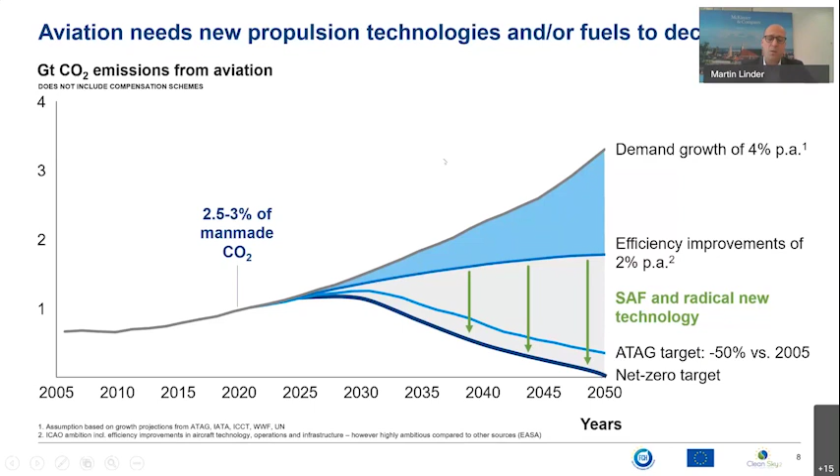The aim of the study was to investigate this latter option, the use of hydrogen to propel the airplanes of the future. In the course of this project, we evaluated whether hydrogen has potential, what technology developments are necessary, at what cost it could be realized, and what challenges need to be overcome. The objective of the study was neither to give predictions nor to provide an in-depth technical feasibility study. The purpose was to understand whether hydrogen has potential and therefore whether serious research and development effort should be devoted towards its development. We performed the analysis on 2 levels, the aircraft design and the infrastructure requirement.

The focus was on hydrogen propulsion. This includes 3 types of aircraft: aircraft that react hydrogen in fuel cells, and the resulting electricity then drives the motor and the propeller; aircraft that burn hydrogen in turbines; and a combination of both, a so-called hybrid hydrogen aircraft. Our findings demonstrate that hydrogen has significant potential to decarbonize aviation alongside other technologies. It is not the only solution, but it is an important part of the solution.

We developed this study together with industry, academia, and researchers. The 24 companies and organizations listed here participated. The group includes aircraft manufacturers, component suppliers, airlines, airports, and research institutions. A big thank you for all your valuable contributions. Without you, this report would not have been possible.

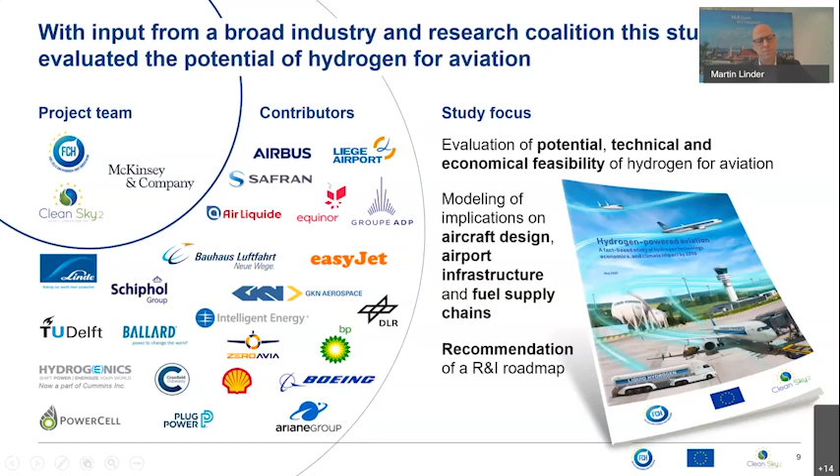We start by clustering the commercial aviation sector into 5 segments characterized by the amount of passengers transported and the range traveled. So on the left, you can see commuter, regional, short range, medium range, and long range aircraft. Roughly 2/3 of today's CO2 emissions come from flights operated by short and medium range aircraft. So flights with 81 to 250 passengers.

These aircraft account for the major stake of the global fleet, about 70%. Less than 5% of emissions are caused by regional and commuter aircraft. The remainder of emissions stem from long-range aircraft. For each of the segments, one concept aircraft powered by hydrogen was designed. For these analyses, we evaluated the climate impact, the technical feasibility, not only for the aircraft design, but also the infrastructure and the economics of such aircraft.

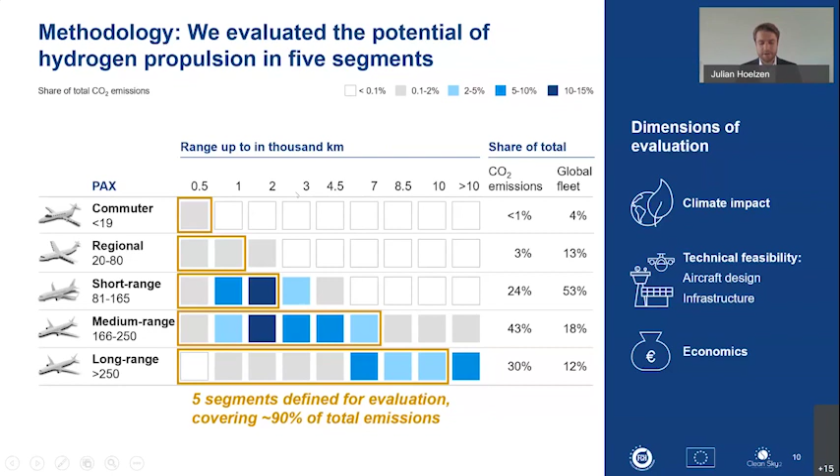In addition to this, we compared hydrogen-powered aviation to aircraft powered by sustainable aviation fuels, focusing on synthetic fuels. Let's turn to our analysis and results on climate impact next. Let us first take a look at how aviation contributes to global warming. On the one hand, there are CO2 emissions, and every ton of fuel burn produces 3.15 tons of CO2. Beyond CO2, there are also other emissions, such as nitrogen oxide, soot, and water vapor, which create contrails and cirrus clouds. These non-CO2 emissions also have a climate effect.

To assess the full contribution of aviation to global warming, we need to consider CO2 and non-CO2 emissions. There is still an ongoing scientific debate about how much non-CO2 emissions contribute and the translation into an aggregate measure. In this study, we used the concept of global warming potential measured in tons of CO2 equivalent and looking at a time horizon until year 2100. For conventional aircraft, research shows that the climate impact of all propulsion-related emissions could be 2 to 4 times compared to the effect from CO2 emissions alone.

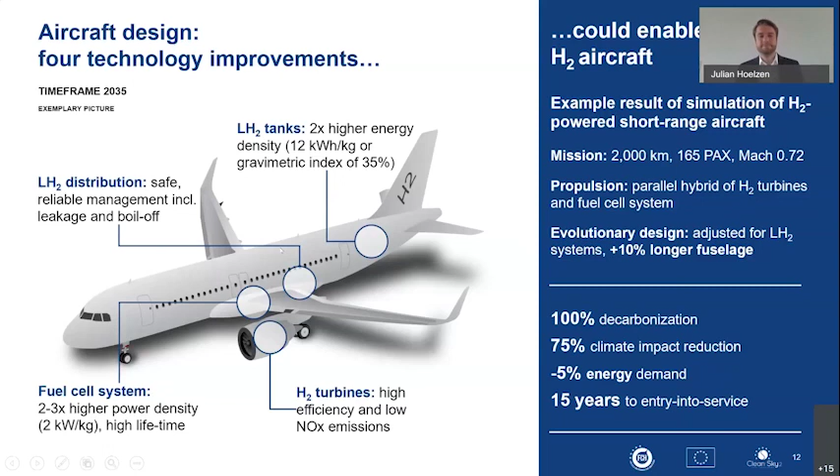So hydrogen propulsion not only has an effect on aircraft design, but also on the airport and fuel infrastructure, which we will discuss next. One of the key enablers to make hydrogen-powered aviation feasible is the availability of appropriate infrastructure. To test this, we built a scenario for deployment. We then tested whether there are roadblocks for building the infrastructure for this envisioned deployment.

We actually differentiated between two horizons, until 2040 and the decade afterwards. You can find the earlier horizon on the left-hand side of the slide you're looking at. In this earlier horizon, until 2040, there are only commuter to short-range aircraft that could possibly fly on hydrogen, given the earlier conceivable entry into service dates of these planes.

For illustration purposes, let us assume that 15% of the global fleet is replaced with hydrogen-powered aircraft by this time. In these early years, we foresee no insurmountable technical roadblocks to enable hydrogen-powered aviation. Hydrogen demand from aviation would comprise roughly 5% of total global hydrogen demand. This demand could thus be served by the prevailing hydrogen supply industry.

There would only be need for limited infrastructure updates beyond that at airports, given the smaller share of hydrogen flights and low amount of fuel needed. For example, liquefaction could happen off-site, and aircraft refueling could happen via liquid hydrogen refueling trucks, a technology that is already available today. Refueling times could become longer as volumetric density of liquid hydrogen is lower than kerosene's. However, we believe that the aircraft turnaround times don't need to be extended for these shorter range flights.

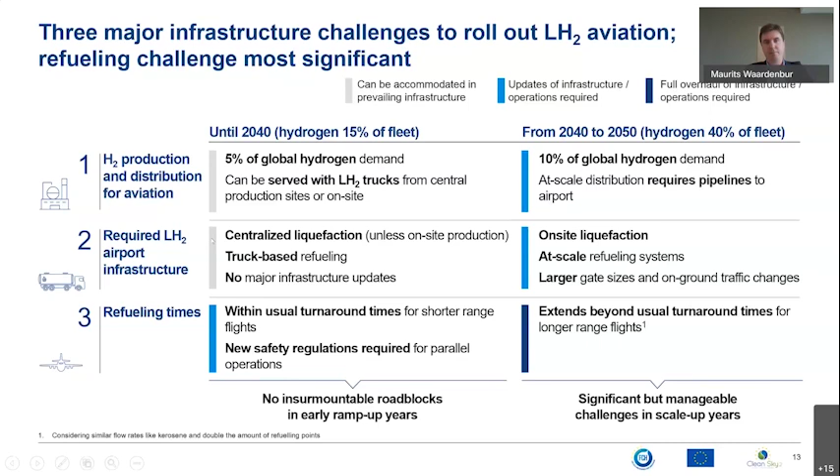On this slide, we examine the cost of using hydrogen aircraft through total cost of ownership. That is, the total cost of purchasing and operating an aircraft over its useful life. Importantly, we are comparing the cost assuming that all aircraft are manufactured and used at scale. Hydrogen propulsion affects the total cost of ownership of an aircraft through different fuel costs, also through CapEx and additional maintenance costs, and then there's other costs like indirectly via infrastructure.

Let us examine the case of a short-range aircraft first, as an example. In 2040, our analysis shows that a hydrogen aircraft would increase total cost of ownership by 25% for a sample flight of 2,000 kilometers. To illustrate that, that would be equivalent to about 18 euros additional cost per passenger.

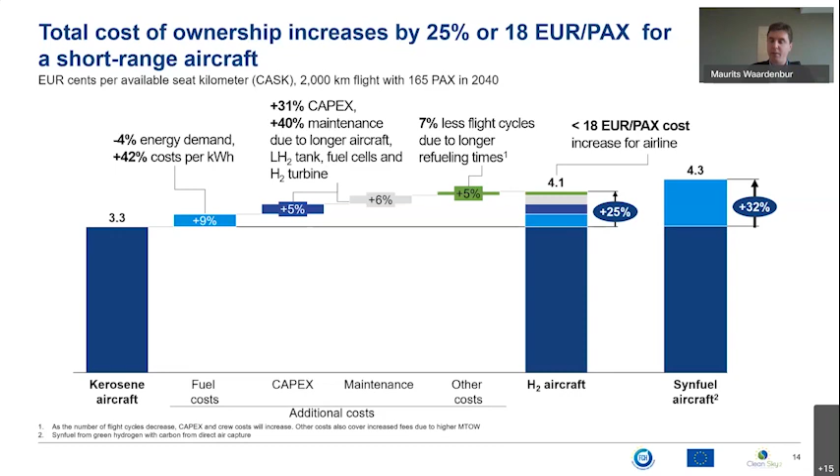As a next step, let me show you the economics of other hydrogen aircraft segments we looked at. This slide shows the projected entry into service cost per available seat kilometer versus kerosene and syn fuel, and abatement cost of each of the segments we looked at. Looking purely at cost, the economic analysis shows that hydrogen propulsion could be less or equally expensive than syn fuel powered aviation for all aircraft segments up to medium range in 2040 already.

Only for the long range aircraft, where the aircraft is significantly larger and less fuel efficient, syn fuel would be a more competitive option. This comparison only shows the pure economics behind this, but it is important to evaluate and connect these costs to the climate impact reduction as well, since after all, that's what we're after. These so-called abatement costs can be seen all the way on the right-hand side of the slide.

It shows how much it costs to abate a ton of CO2 equivalent emissions with hydrogen and with syn fuel propulsion. Despite the range of uncertainties behind the reduction potentials, a clear ranking order can be observed. For commuter to short range aircraft, it could be more competitive to reduce their climate impact with hydrogen propulsion than with syn fuels from direct air capture.

For medium range, as you can see, hydrogen could still likely be more competitive, but syn fuels are on the upper end of the uncertainty range. Syn fuels would be more economic to abate the climate impact of long-range aircraft, as you can also see. In the next step, we tested the potential abatement of climate impact in the scenario of hydrogen aviation deployment by 2050.

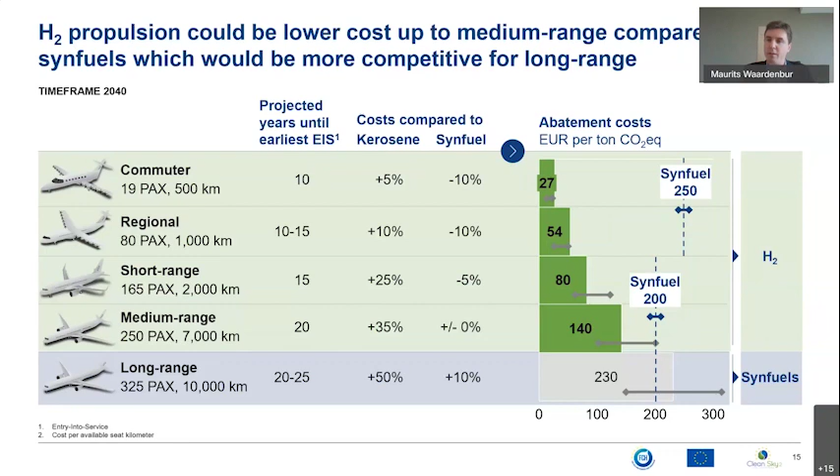So to estimate what the impact of hydrogen in aviation could be, we developed a scenario in which the aviation sector is fully decarbonized. The scenario assumes that the technology gets developed and commercialized as described before. This results in a picture in which hydrogen and sustainable aviation fuels, including syn fuels, are complementary and jointly cover all aircraft segments from commuters to long range, indicated by the green and blue areas in the diagram. In this scenario, hydrogen-powered aircraft initially replace conventional aircraft in the commuter to short-range segment and half of the medium-range segment. So how does that work in detail?

Commuter, regional, and short-range hydrogen aircraft would start to come into service between 2030 and 2035. New aircraft after these years are assumed to be hydrogen-powered. Medium-range hydrogen aircraft start to become available after 2040. In this segment, 50% of new aircraft are hydrogen-powered and 50% are supplied by synthetic fuel. We do not foresee hydrogen propulsion for the long-range segment until 2050. For this segment, syn fuel is the more feasible and cost-optimal solution. All aircraft that are not replaced with hydrogen aircraft are powered by sustainable aviation fuel.

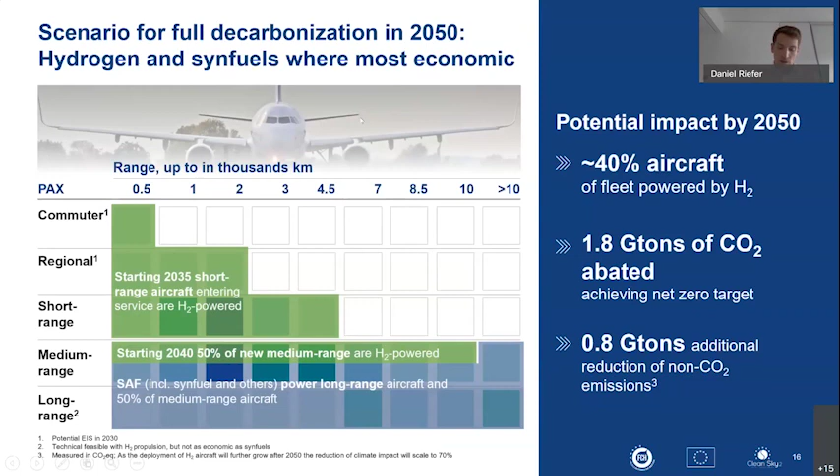So in order to get where we want to be in 2050, we identified key enablers for hydrogen-powered aviation. This research and innovation roadmap is structured in 3 time horizons, the columns that you can see on the chart, and 4 areas of key enablers. We foresee 3 major milestones. In 2028, we aim for a proof of technical feasibility and first certification rules of a commuter hydrogen aircraft, and a first demonstrator short-range aircraft as a requirement for potential entry into service by 2035.

In the second horizon, from 2028 to 35, and building on these designs, we envision a medium-range aircraft demonstrator for a potential entry into service by 2040. By then, a safe and efficient refueling setup for airports should also be available. Lastly, until 2050, further assessment on hydrogen as an energy source for long-range aircraft is required, such as the development of a revolutionary demonstrator concept.

In parallel, innovation should focus on developing a large-scale refueling infrastructure, with at-scale solutions for insulated airport pipeline refueling systems, so-called hydrant refueling systems. In our report, these milestones are detailed in 4 work areas: components, the integration into aircraft systems, infrastructure, and a supporting regulatory framework. You can find more details on the research and innovation priorities in our report.

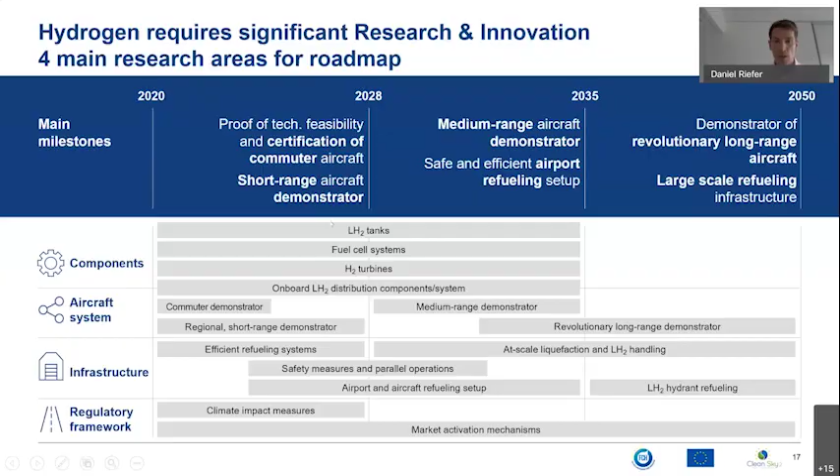So in order to achieve net zero, R&I investment needs to happen already today. It will require a significant budget, and both industry and regulators need to work together to remove roadblocks on the way ahead. So all in all, our study shows that hydrogen propulsion has significant potential as one major option for decarbonization, alongside other technologies, such as sustainable aviation fuel. There are 4 main takeaways that summarize our findings.

Firstly, hydrogen can become a compelling option, mostly because of its efficiency and climate performance. Serious technology development is required in fuel cells, storage, and liquid hydrogen systems, but the technology challenges seem manageable. Action is required now. To meet the 2050 net zero target, research and innovation need a major boost. A short-range demonstrator airplane is required by 2028, with subsequent development as presented before.

Economics are feasible. The per-passenger price premium for traveling on a hydrogen-powered short-range flight could be about 18 euros. For segments up to short-range flying, this could be less than the price premium resulting from synfuels. Climate impact can be significantly reduced. A hydrogen airplane has 0 CO2. Its total climate impact, also counting non-CO2 effects, is up to 70% lower than a kerosene aircraft. This makes it the lowest emission option for commercial flights.

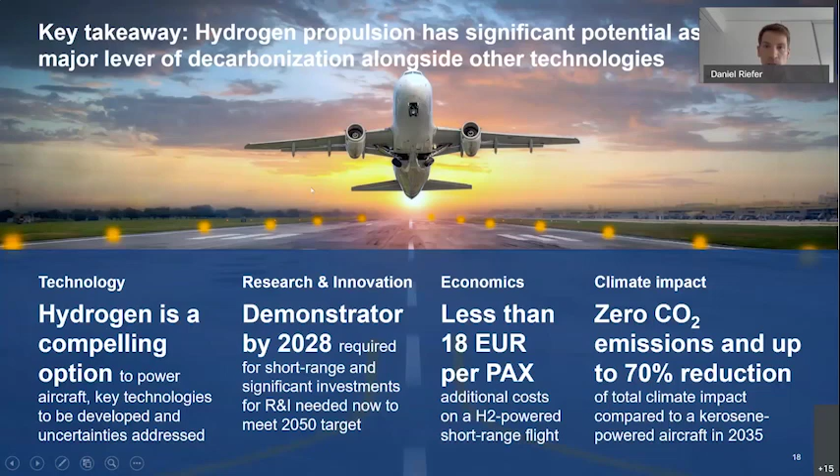Yes, hello. Excellent. I deplore the fact that I couldn't connect video. Apparently my team here tried to do that, but with all the logistics here in the commission, in the office, layers and layers of security, apparently we couldn't connect to your call. But nevertheless, it's a pleasure for me to be part of your debate today. The presentation was really, really interesting.

And if you will allow me, I would give you a couple of my thoughts with the view of what we are supposed to work on, meaning the decarbonization of aviation. I do believe that it's also the right time for us to step up the work to reduce the emissions in aviation, potentially with the help of hydrogen. We are about to launch a European hydrogen strategy from the research and innovation side. We are proposing a new joint undertaking for clean aviation under Horizon Europe. I know you'll have later Commissioner Gabriel also. And we are preparing our comprehensive strategy for sustainable and smart mobility for later this year.

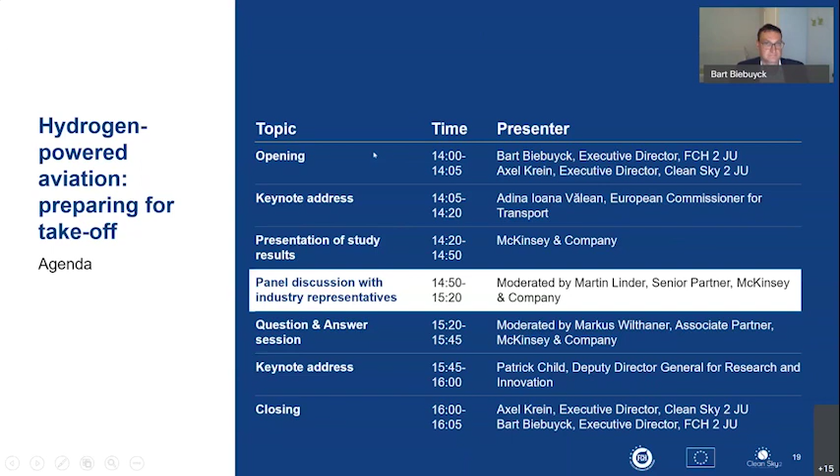Let us now move to the panel discussion with leading representatives from the relevant industries. I'm delighted and honored to be joined on our virtual stage by Stéphane Cueille, Chief Technology Officer, Safran, Glenn Llewellyn, Vice President, Zero Emission Strategy with Airbus, David Burns, Vice President, Clean Hydrogen, the Linde Group, Per Ekdunge, Executive Vice President, PowerCell, and Rolf Henke, Member of the Executive Board, DLR, Deutsches Zentrum für Luft- und Raumfahrt. Dear gentlemen, welcome and many thanks for joining me.

The panel aims at giving floor to leading players shaping the ecosystem of aviation, hydrogen, and also alternative technology. I would be excited to get your view on the potential of hydrogen to decarbonize aviation of the future and your broader vision for the transition to new technologies and fuels. Before we get into the discussion, it would be great to start with a short opening statement by each of you. May I ask you, Stéphane, to kick us off?

Okay, thank you very much. Good afternoon, everyone. So just to say that H2 will have a role to play definitely in the decarbonization of aviation. And there are two options for it to play a role, and that could be both options in parallel. It's using it to produce e-fuels or what you call synfuels. And they will be needed for the existing fleet and also for all longer range aircraft.